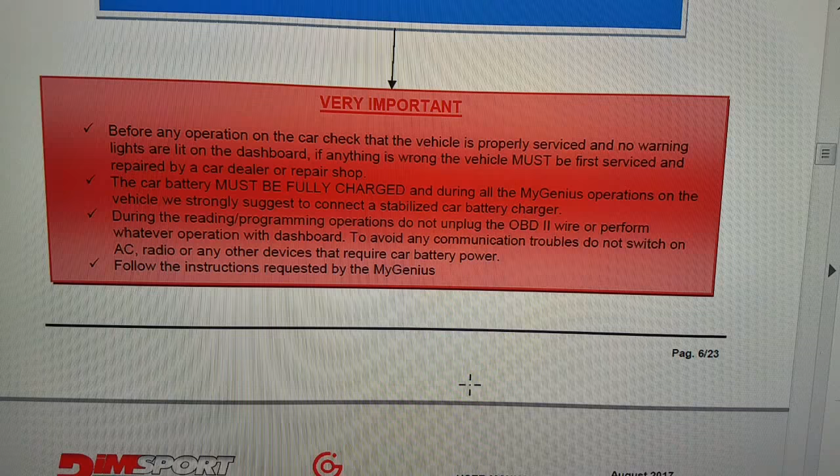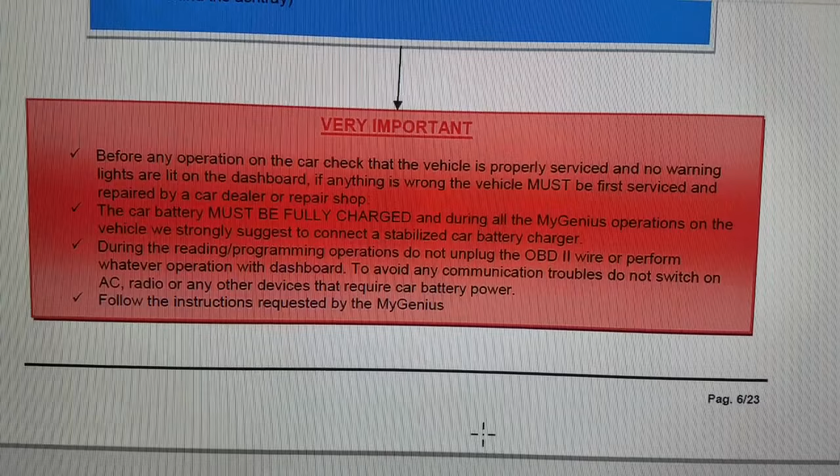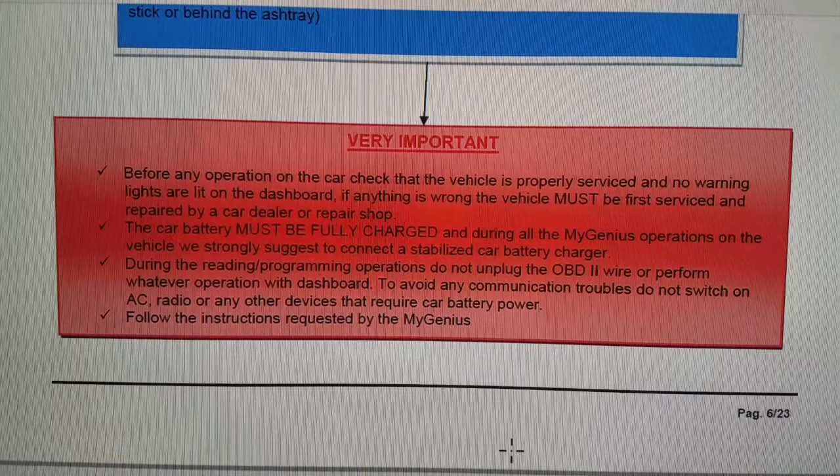Now, before we go out to the car, I need to read this out to you guys. You guys need to make sure you follow these rules very carefully. Before any operation on the car, check that the vehicle is properly serviced and no warning lights are lit on the dashboard. If anything is wrong with the vehicle, it must first be serviced and repaired by a car dealer or repair shop. The battery must be fully charged. During all MyGenius operations on the vehicle, we strongly suggest connecting a stabilized car battery charger.

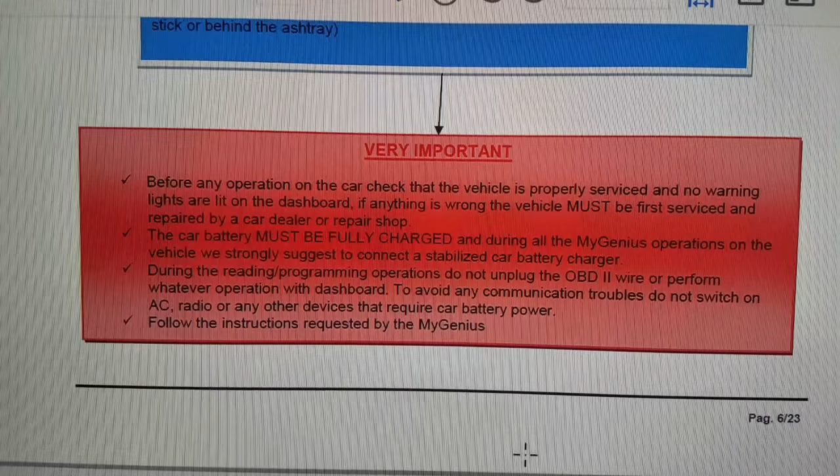During the reading and programming operations, do not unplug the OBD2 wire or perform any operation with the dashboard. To avoid any communication troubles, do not switch on AC, radio, or any other devices that require car battery power. Follow the instructions requested by the MyGenius. That tuner is going to walk you through the steps, so please follow those steps carefully and do not deviate from them.

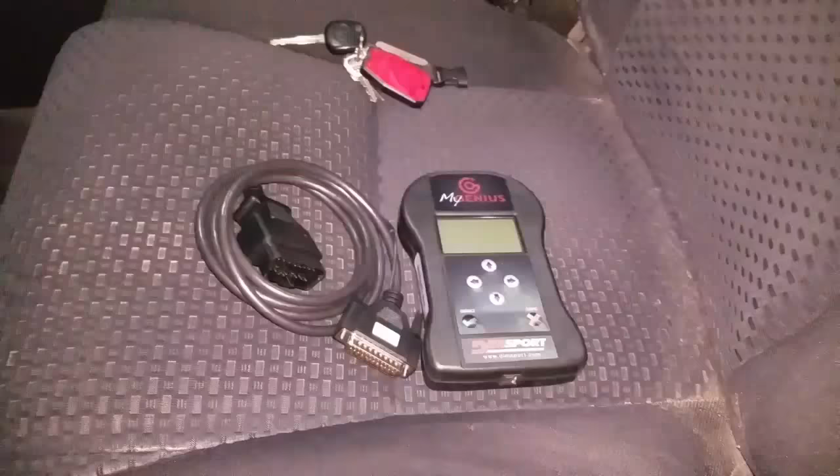So now that we have that done and I went over these rules, let's go out to the truck and hook it up. Okay, so here we are outside with the vehicle. Sorry about my seats, they're a little dusty. My truck, I do beat it up pretty good.

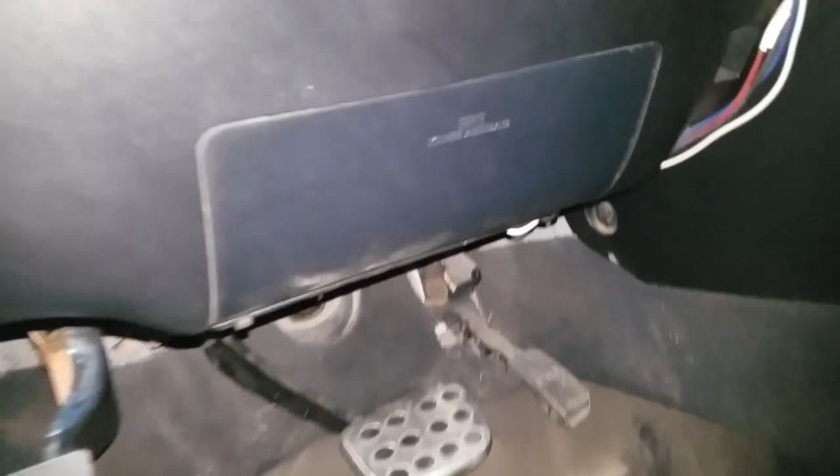But what you're going to do is get that OBD cable and plug it in. This is a 2010 Toyota Tundra. You're going to look underneath the dash here and you're going to see your OBD2 port right there.

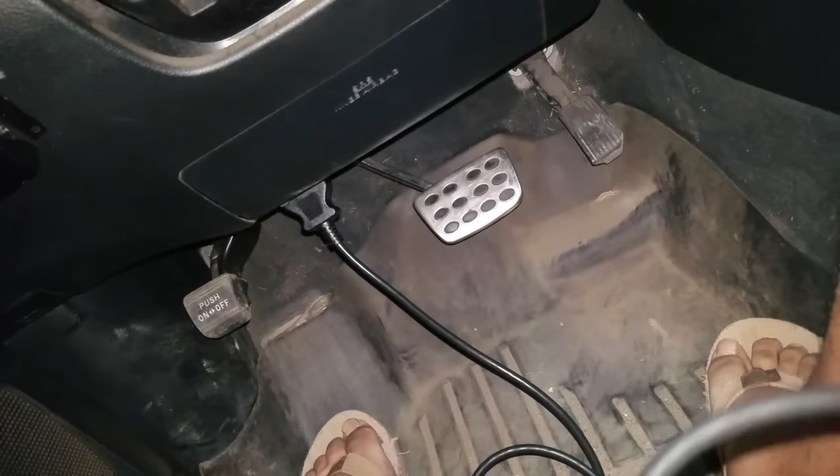Okay, so now that I have the cable plugged in down on the bottom of the OBD2 port, we're going to be plugging in this cable to the bottom of the Dimsport tuner. Let me go ahead and plug that in because I only have one hand to work with.

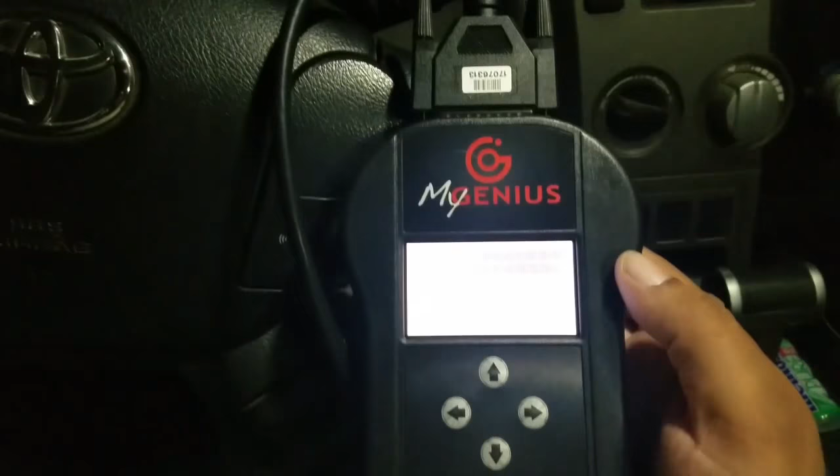Okay, so as soon as you plug in the tuner, it is going to light up without anything being turned on the dash. The first thing that you're going to do is hit Work. So right here on the screen, you're going to hit Work, hit Identification. Okay, we're going to select Toyota.

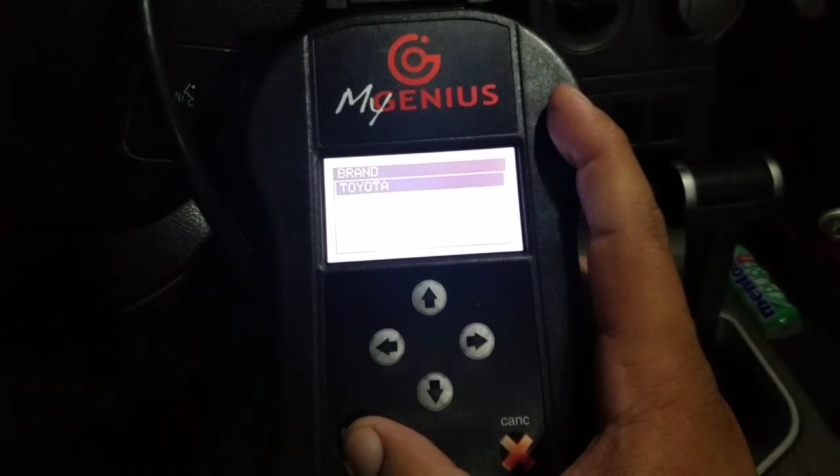Then you're going to go down and find your model. Okay, so I had to scroll down some, but here we go: Tundra 2 Series.

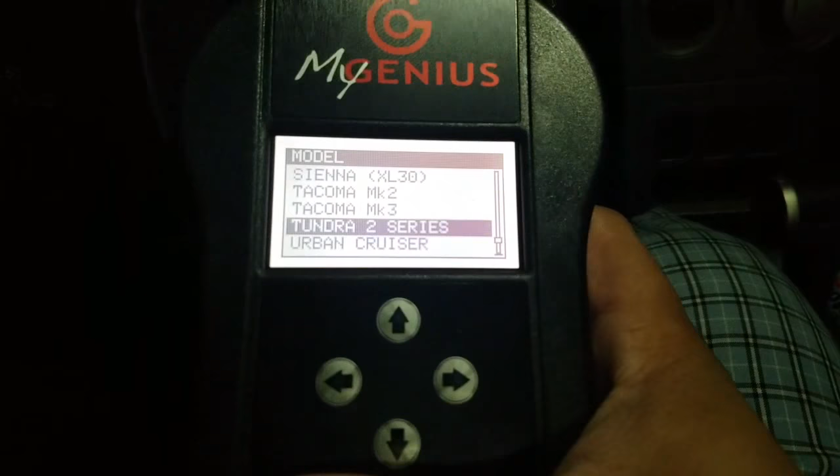You're going to pick the type of engine that you have. In case you were wondering between the two selections, the top one is a naturally aspirated engine, and the bottom one is a supercharged engine. DAP Tuning does not suggest doing the remote tuning on a supercharged truck; they would prefer to do it in person. So please pick the top choice for the naturally aspirated engines.

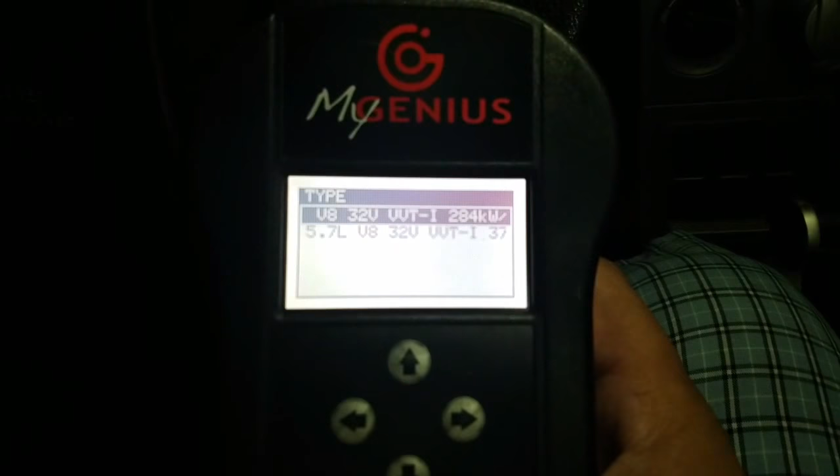Now you're going to follow the instructions on the MyGenius DIM Support Tuner. It says switch on the dashboard, check the connections, and press OK. So I'm going to get the key and turn the ignition on. We are not going to turn the vehicle on.

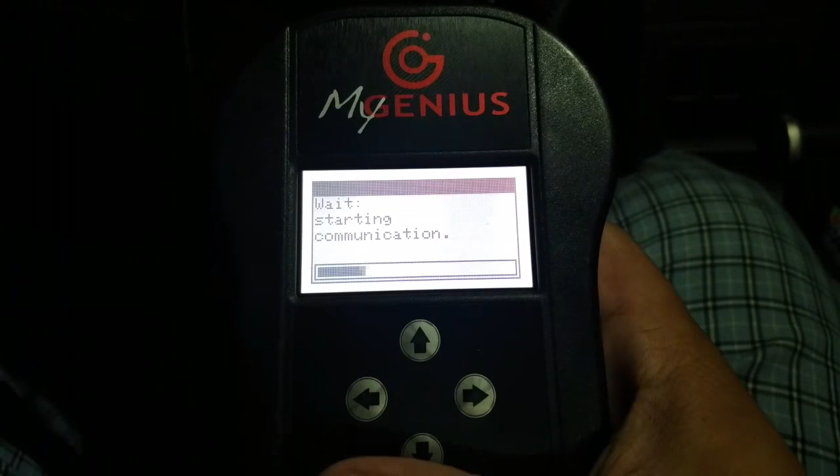From there, we go back to the tuner and hit select. We'll just wait, it's communicating to the vehicle. Identifying ECU, and I'll come back as soon as it's done. So that's it, it's ID'd the ECU.

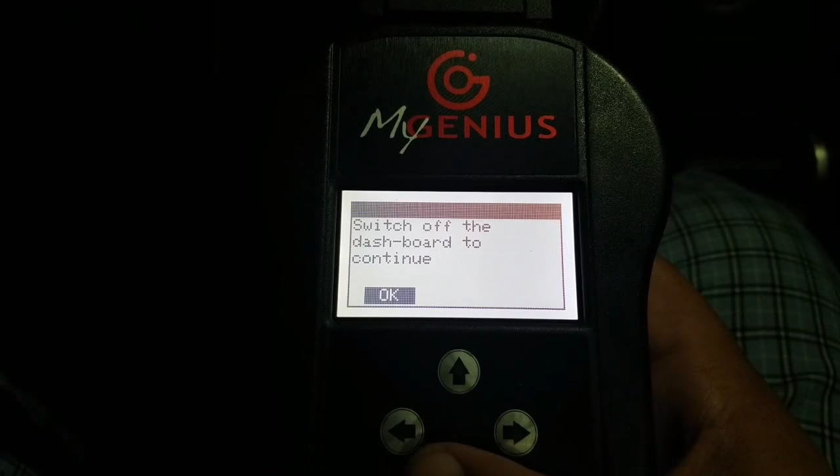So we're going to go ahead and turn off the dashboard. We're going to hit select. There it is.

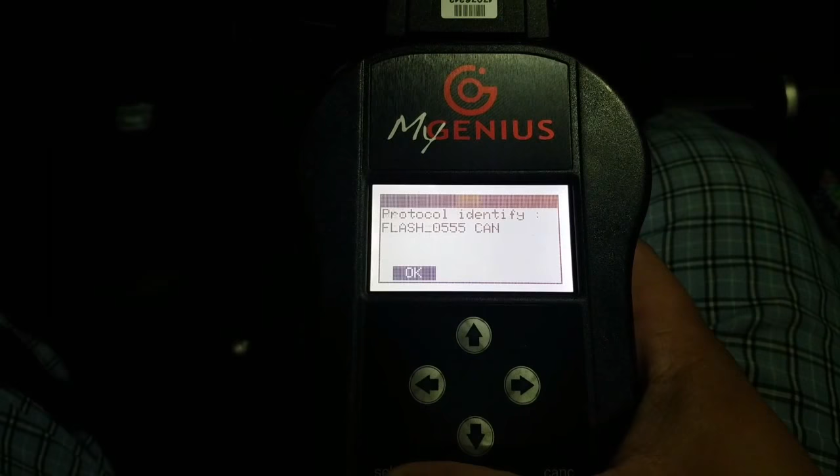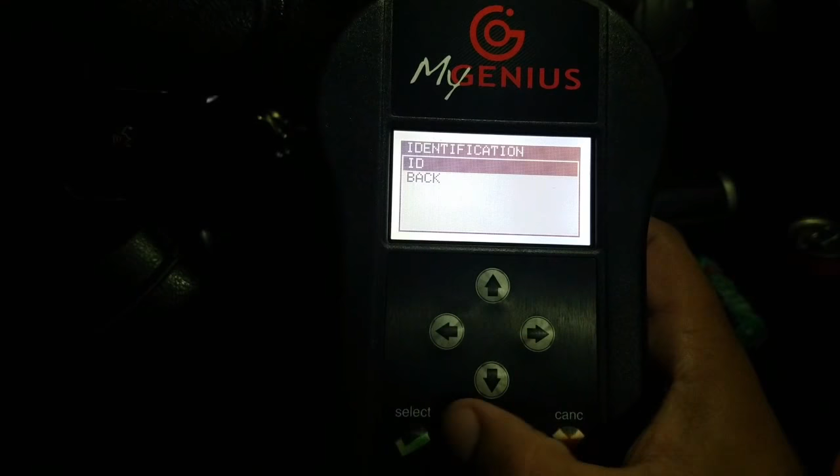Okay, so after it has identified your ECU, you're going to go ahead and hit select. You're going to hit ID, so hit select again. We're going to do the same process where we turn on the dash, go back to your tuner, and hit select again.

Almost done. Okay, now we're going to go ahead and switch off the dashboard. Hit OK over here. Focus. And that's it, okay, so we're back to the main menu.

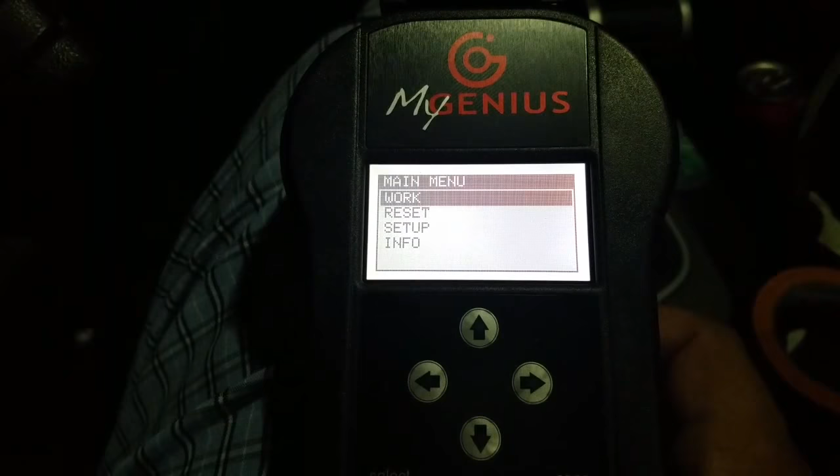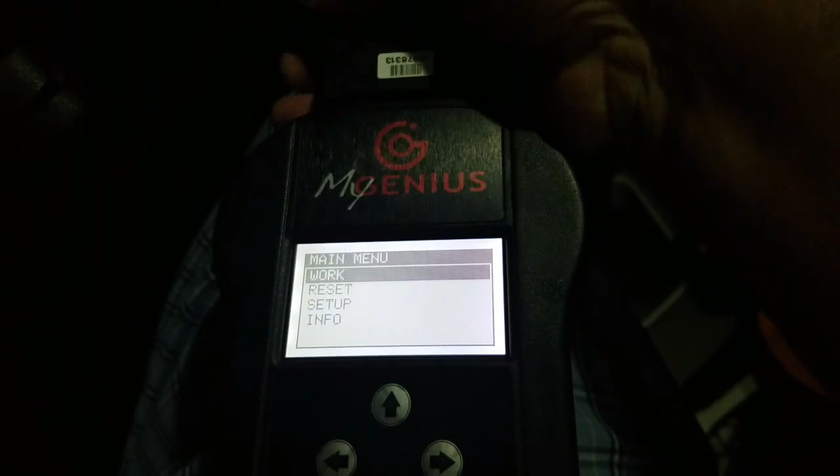Now what we're going to do is take the key out. Unplug this first from the tuner, and unplug the OBD cable, and let's go back inside to the computer.

So I went ahead and reconnected my USB cable back to the tuner, and we're going to go on the computer and reopen the program. Okay, now that I've restarted the MyGenius client, you're going to notice that these two buttons are now selectable. So you're going to go ahead and hit download from MyGenius.

Okay, the device is connected, so we're going to go ahead and hit next. Now I like to put my file somewhere where I know it's going to be, so what I'm going to do is put it on my desktop. Hit next, and then we're going to hit yes. So now what it's going to do is put that .fpf file right on your desktop.

After that file has finished transferring to your desktop, the next thing you're going to be doing is getting that file to your email client, whether it's Yahoo, Gmail, Hotmail, whichever email client you use. You're going to go ahead and close this screen. You are going to find your file, so for me, since I put it on my desktop, it's going to be here. You are going to email that file to...

I'm going to go ahead and hit compose. Go over here, I'm going to type in DAP Tuning. Okay, so after you have the email in there for DAP Tuning, I like to put in the subject line just my VIN number and .fpf file, so he knows what I'm talking about. Here's the ID file for my vehicle.